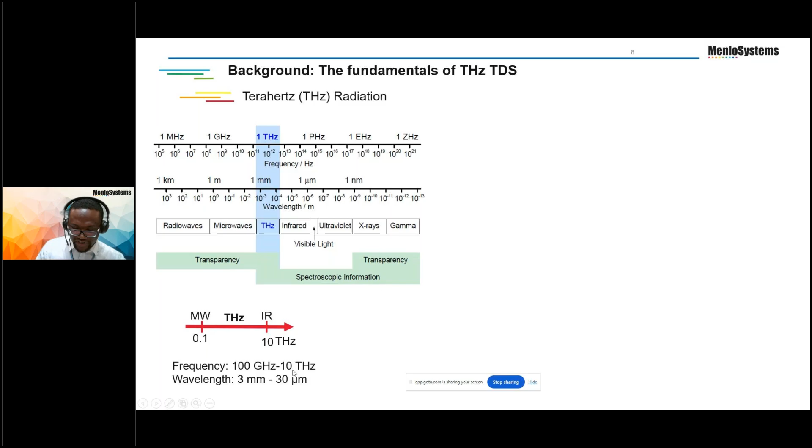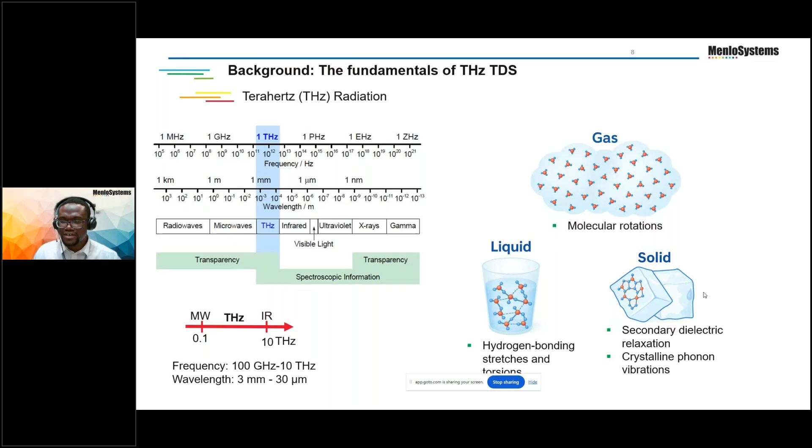And you can also do spectroscopy. About 0.1 to 10 terahertz is mostly a very interesting range for terahertz. When we consider the three states of matter, in gases we are talking about molecular rotations, so terahertz could probe this type of bonds. In liquids, hydrogen bonding. And in solids, we are talking about secondary dielectric relaxations and also crystalline phonons. So terahertz could probe this intermolecular movement.

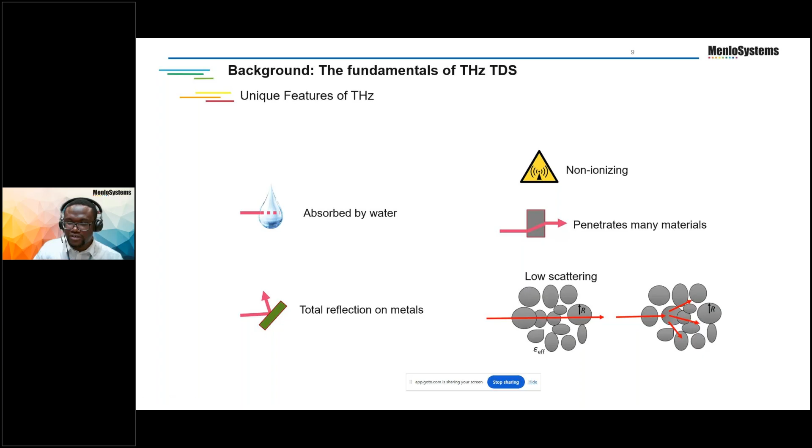In terms of the properties, as I've already mentioned, water absorbs a lot of this radiation, but metals totally reflect the radiation. It is non-ionizing and it penetrates a lot of material. And when you're dealing with powders, terahertz has a longer wavelength compared to the particle sizes, so less scattering, which means you can also penetrate, especially products made from particles.

We have two main sources. We have the continuous wave, where we are talking about monochromatic terahertz wave frequency. So you may have a single frequency and then you can tune it, typically between 0.05 to 4 terahertz. And then we have the broadband one, and at Menlo we provide our commercial systems based on the broadband systems. Here we are talking about 0.1 to 6 terahertz.

So with the continuous, it's just like dealing with X-rays or FTIR spectroscopy. Here you are measuring intensities, but with the pulses, we are measuring the electric fields, so you have access to the complex optical constants. You have both the real and the imaginary part of your optical properties.

And then the sources, there are various ways of generating terahertz. We have the quantum cascade lasers and ionization of plasmas, and with this you could have even higher watts of terahertz radiation. But we are going for the optical generation. Here we have the nonlinear way, which is called optical rectification, and then the photoconductive switches. At Menlo, we are working with the photoconductive switches because it has several advantages.

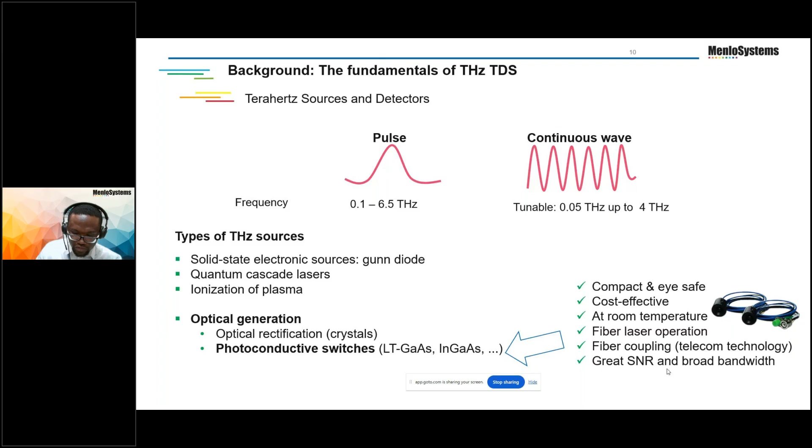So what happens at the detection? The detecting material is similar. Here you have your femtosecond laser, which pumps the detector. You create carriers, but there is no bias voltage to drive these carriers. Now these carriers are driven by the arriving terahertz pulses. So by delaying this, we can scan or sample the electric field of these terahertz pulses.

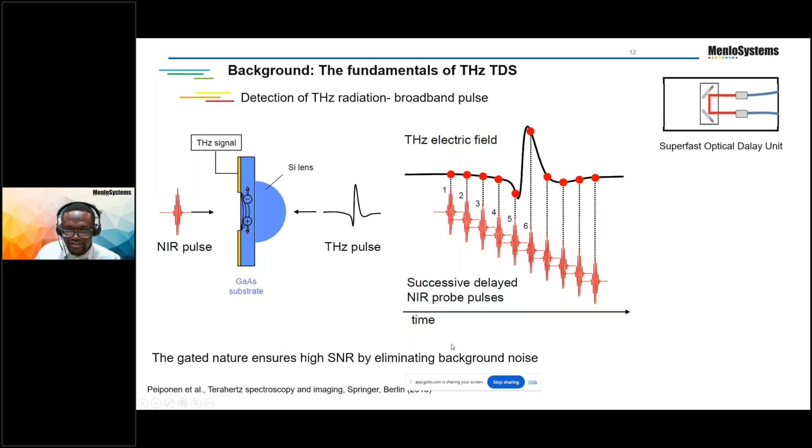As you can see, if the femtosecond laser hits the detector, it switches on, and if there is no pulse, it switches off. So this is time gated, and by means of time gating, we also get rid of background noise.

Okay, so we've put all this into a very compact system we call the TeraSmart. Here you have your delay line, your lasers, your computer and the data acquisition card, everything inbuilt, the electronics here. So this is fully compact, ready for the industry and OEM customers.

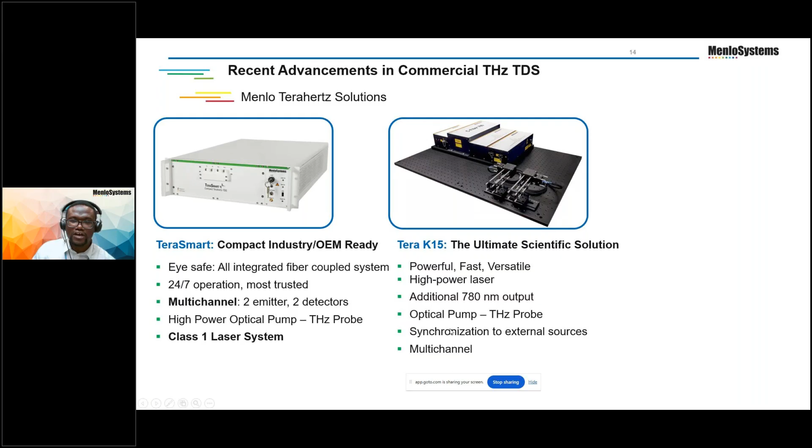And then we have the most versatile one called the K15, and this is mostly meant for scientists to play around. Here you have a bit higher power lasers, but the terahertz performance is the same. But here you can also sync the laser with an external laser. And also you have an additional 780 nanometer output of power. You can also do multi-channel. And these two systems depend on the mechanical delay line.

And now if we want to go even faster, whereby we get rid of the mechanical delay line, then comes the Tera OSE. Here we have two lasers inside this box, and these lasers are synced in such a way that we could track the time and also generate terahertz. So in this case, we don't have any moving stages. So we can scan very fast, and also we can scan very long. Okay, good.

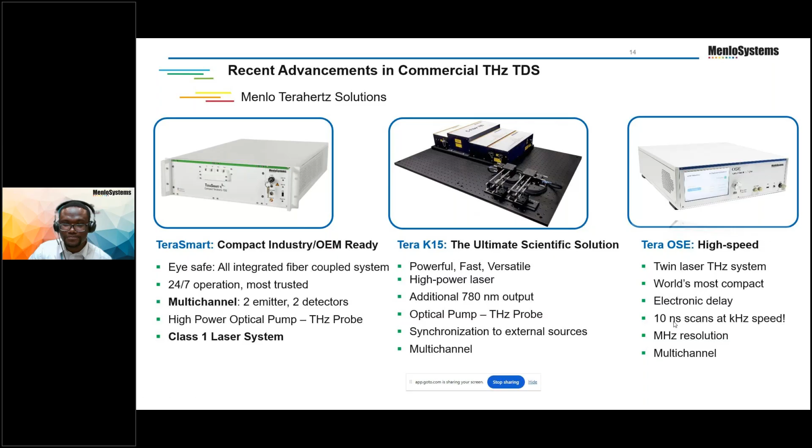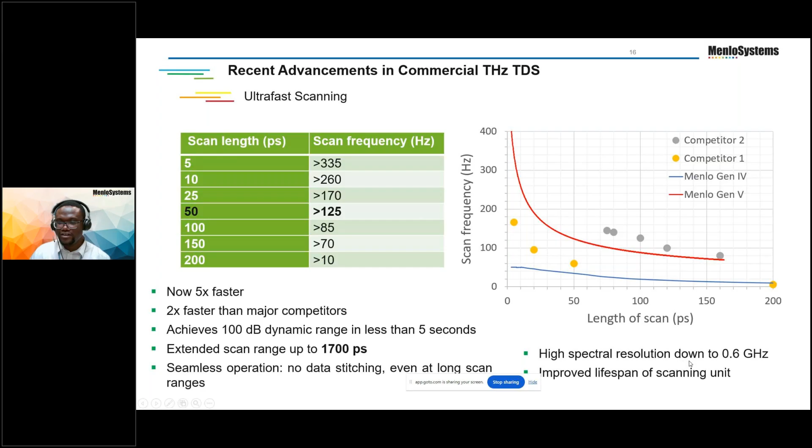These ones are fixed. You cannot change the delay line, right? The scan length. But with our systems, you can extend the scan range up to 1700 picosecond. And you can do this without any data stitching. So this is continuous scanning. And if you can scan longer, that means in frequency domain you have a good resolution.

So we have add-ons also for transmission and reflection. Here you can see our imaging stages and our transmission setup, so you could do transmission. And we have the reflection head for reflection.

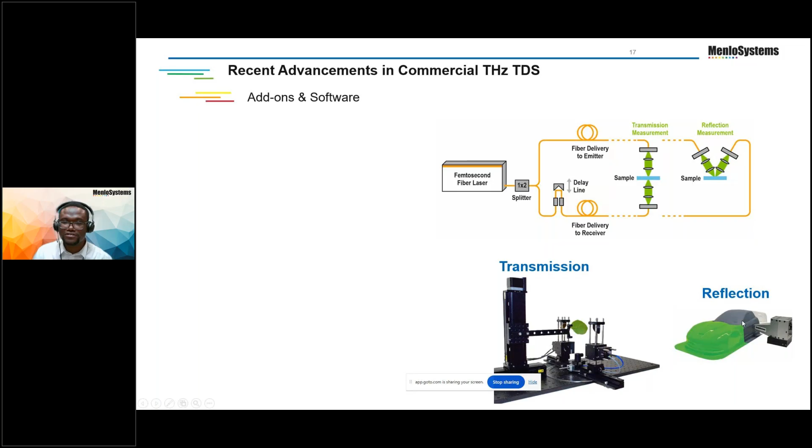And then comes the software. You cannot have good hardware without good software. In terms of software, we have very flexible and user-friendly software. During the measurement, you have software that will help you set your experimental parameters and also do your measurement seamlessly.

And due to our impact in the terahertz market, even open source projects take our systems into consideration, and they develop software which also works seamlessly with our systems. Good.

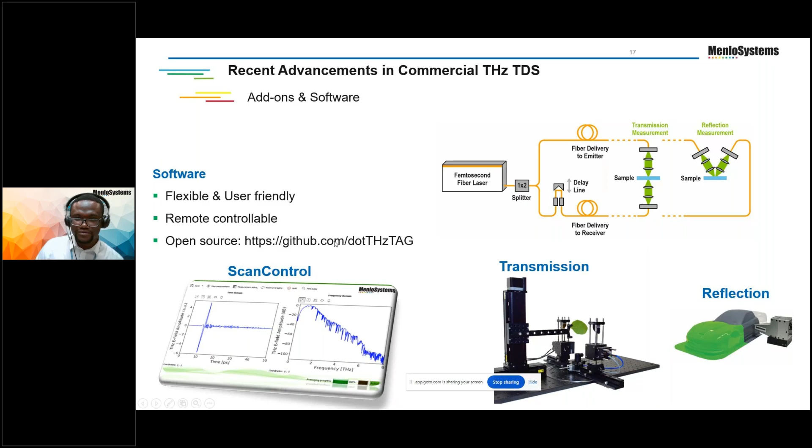In terms of the imaging, we've upgraded and now we have new imaging systems with a new software which is fully integrated. So it is now much easier to interface, it is more flexible to mount, and also working and gathering data is very seamless.

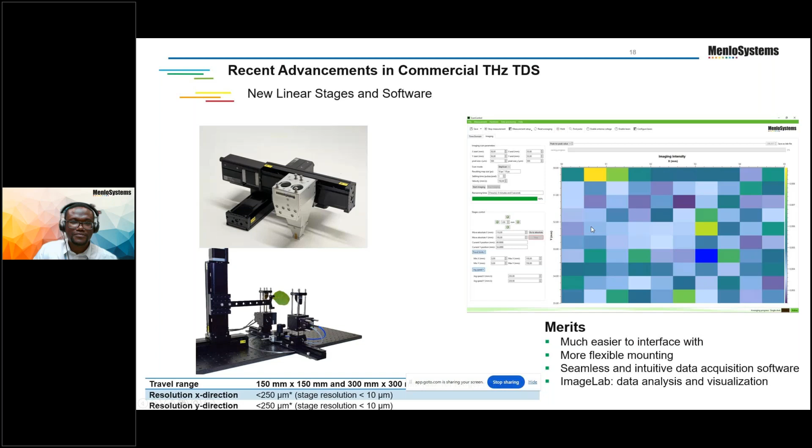The analysis, we have the Image Lab, which is also one of its kind in the market, whereby you could also do a lot of analysis, whether in the time domain or frequency domain, depending on what you want to achieve. And then for customized systems, as I mentioned, you can also do pump probes.

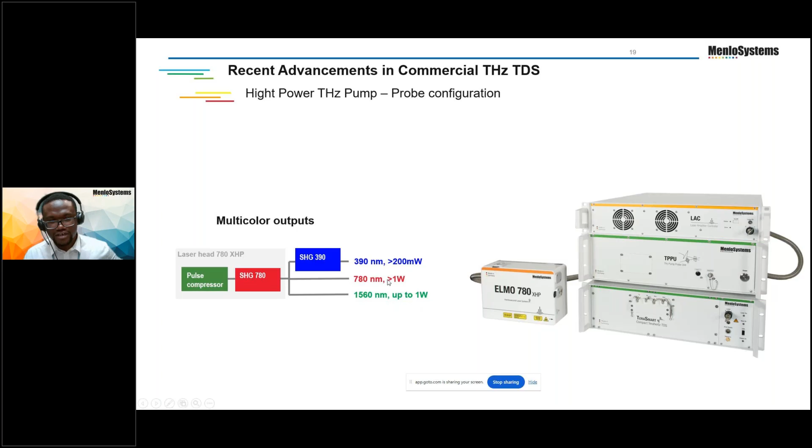So here you hit your sample with either of this, and now you measure what happens to the sample when they interact with this wavelength, with the terahertz. And as you can see here, we can do multicolor. And we can even do more than this. We can do supercontinuum and also other wavelengths and frequencies.

Okay, so that is Menlo, how we've advanced the terahertz technology and how our new systems are performing. So now let's jump into the applications. So terahertz, as we all know, it's upcoming and people are trying it everywhere. So for thickness analysis, for food and pharma, I'll just highlight some of these applications where our systems have been used. So let's jump in straight.

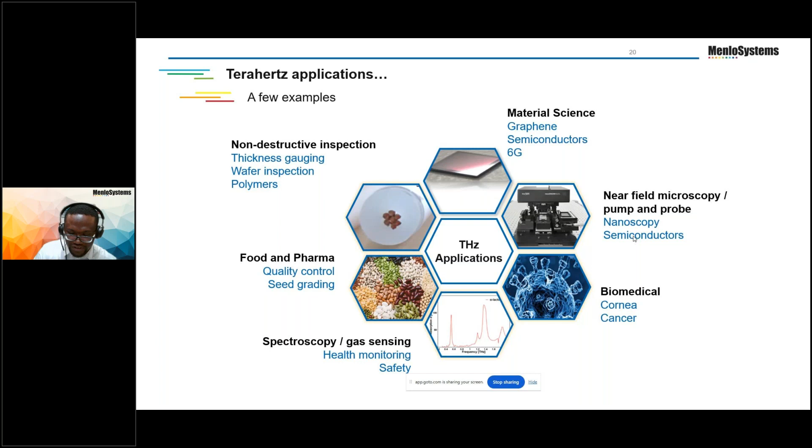So in terms of terahertz applications, thickness analysis, especially in the automobile paint industry, is gaining traction nowadays. And as you can see here, there's a company called Das Nano, and they have a fully integrated terahertz system. And this could be used in real time in checking the layers of painting in the automobile industry.

And what is the importance of doing this? For example, imagine that your car is not properly painted. This could lead to rust, and at the end of the day, it might cause them to repaint. So if you are able to track the process inline, and with terahertz, this is non-invasive, so you can even use it on the wet paint, unlike ultrasound, whereby you need to touch the surface.

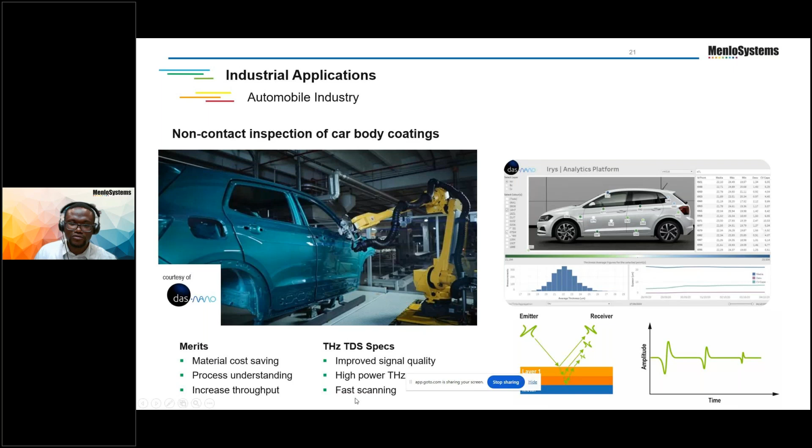So at the end of the day, you save material, you understand your process, you increase the number of cars you paint within a time, you make more profits, and also goods and products are more affordable for ordinary people. And with our new improvement, now you could predict accurately because of speed, power, and you could also scan faster because of our speeds.

And the most important aspect here to check is the uniformity of the coated material in order to make sure that every cell delivers the exact amount of voltage it is meant to deliver. So for thickness, porosity and conductivity, there is terahertz. With terahertz, you can measure the thickness non-destructively or non-invasively. You can also know the porosity.

So here there should be some spaces during charging and discharging so that the ions, especially lithium ions, can fix themselves within the pores. And when you have the optical constants, both the real and the imaginary part of the refractive index or the permittivity, then you can also translate into conductivity.

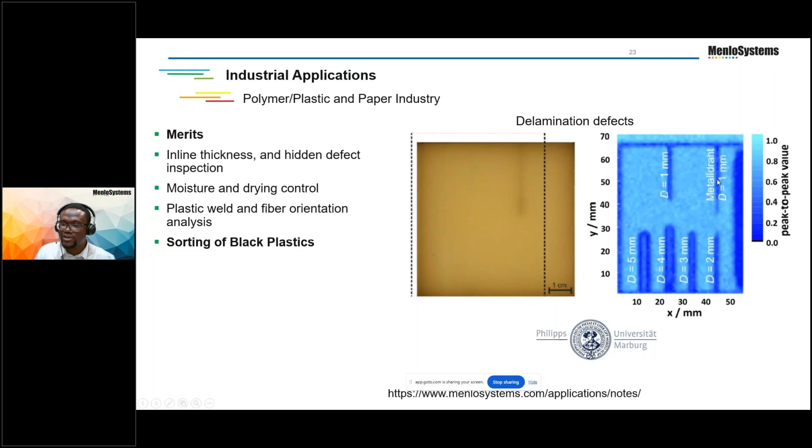And now let's go to the plastic and the polymer world. So when you check our webpage in our application notes, we've done a lot on plastics. So in this figure, you can see that we are detecting delamination or defects in plastics. And these are artificially drilled holes and also metallic substances hidden somewhere. And using terahertz imaging, you could see clearly where these are.

And then in other application notes, we work on trying to also find the percentage of fibers. Sometimes you want to make these polymers a bit stronger, so you add some glass fibers. And here you could see that depending on the percentages, terahertz imaging can also give a clear indication of how these fibers...

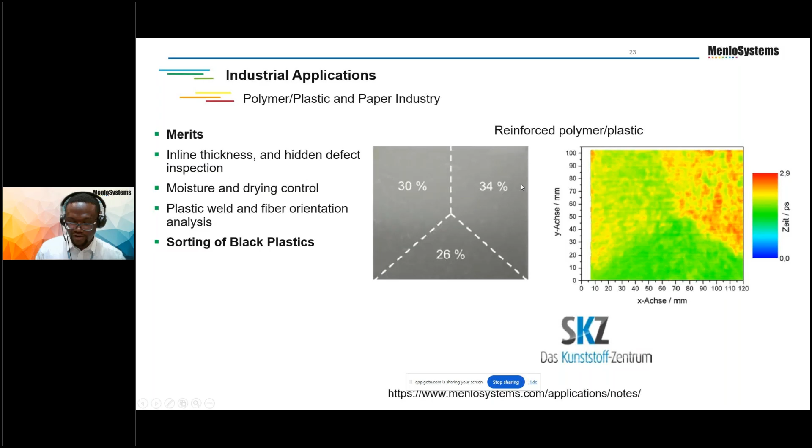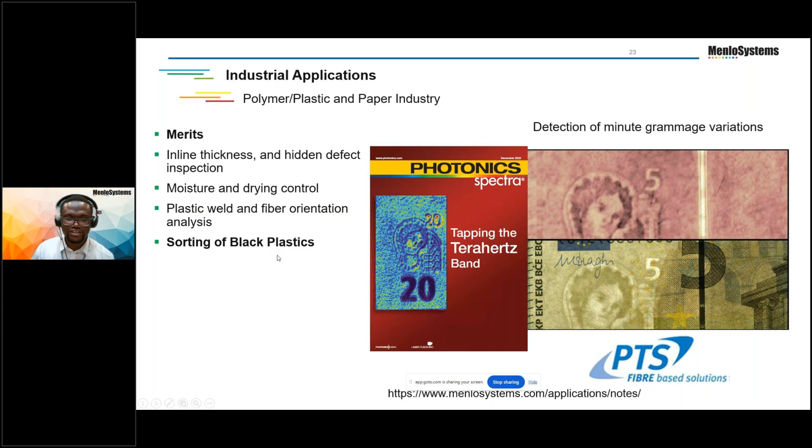And one other interesting aspect dealing with terahertz in plastics is sorting. Mostly it is difficult to sort black plastics. If you look around you, your computers or your chargers or your keyboards, many of these are black plastics. Normally this black material absorbs infrared radiation, which has been used to separate or sort them. So by adding this black material, you cannot use the conventional way. And terahertz has been the best way to sort this plastic because terahertz could permeate this black material.

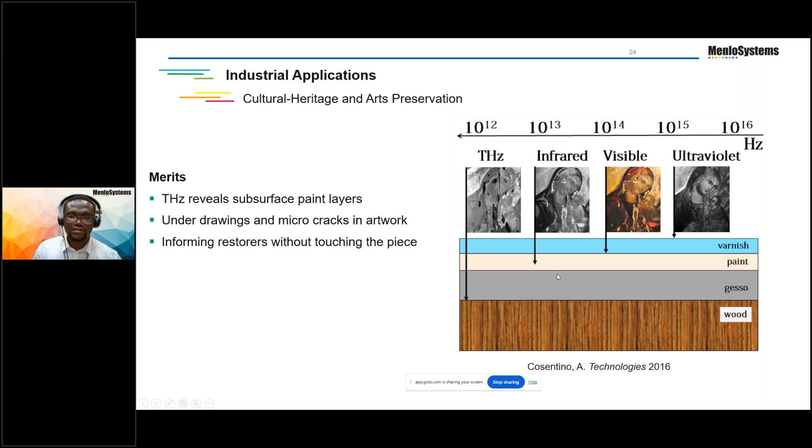And then in terms of cultural heritage and preservation, terahertz has also been used a lot in art to assess and also to restore art. By comparing terahertz to other radiations, you could see that with terahertz we could penetrate even deeper, so you could know the various layers of a paint or art material.

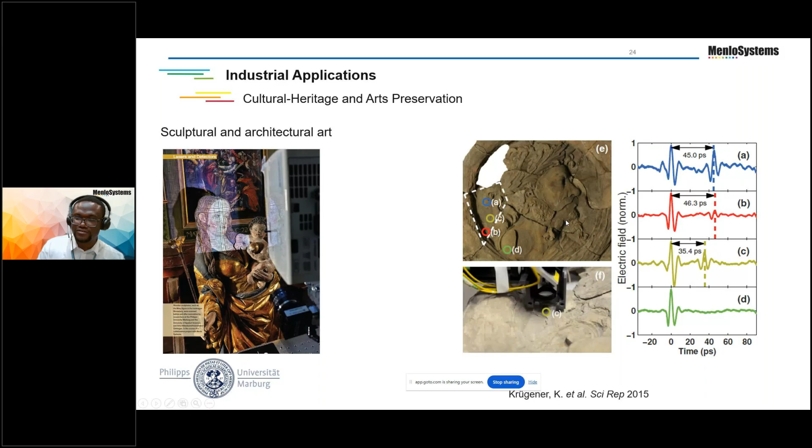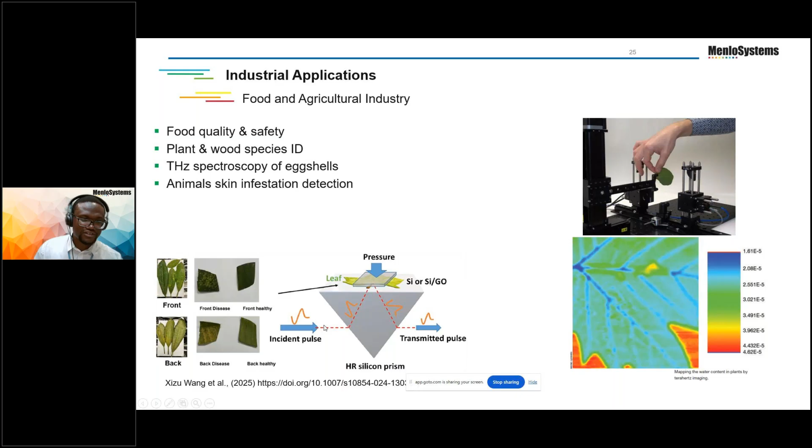And then in food and agriculture, terahertz has also been used in plants. This is an image of a leaf, and this will also give you traces of water content on the leaf. By so doing, you could also detect early diseases in plants. And other research is even using ATR methods to check the health of plants.

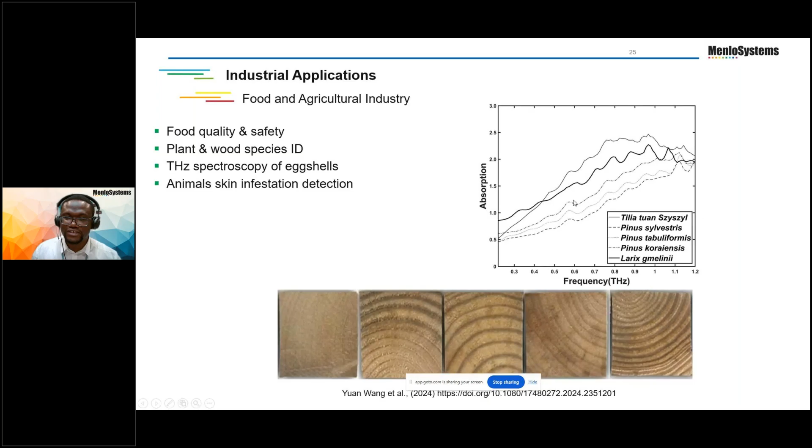Okay, and then eggs are also one of the interesting applications. You know that terahertz could permeate the shell and also the membrane. So by doing terahertz analysis, we could also check the quality or the fertility of eggs, and this will be quite interesting.

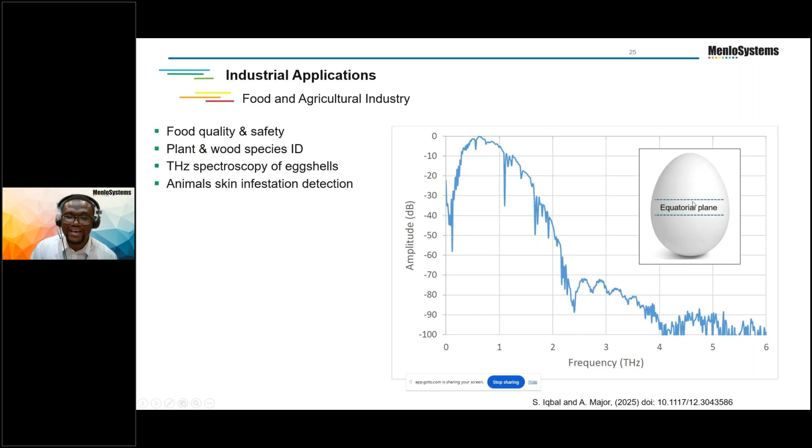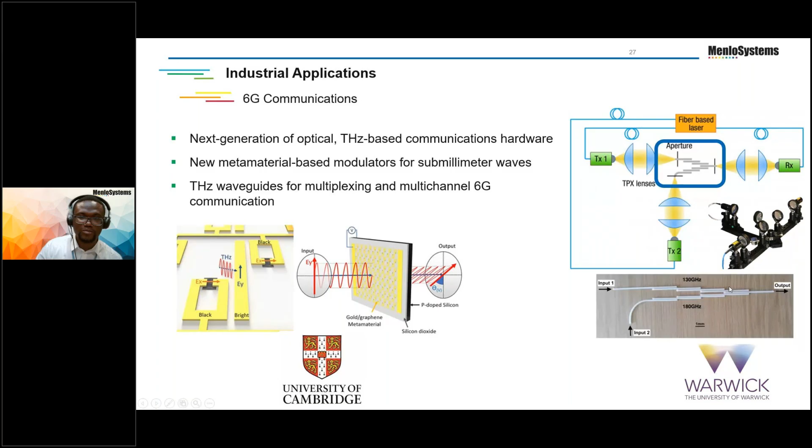And in Warwick, also building or printing multiplexing, like waveguides for terahertz multiplexing. Here you could see we have an emitter, two emitters, one receiver, and each is sending different frequencies. Depending on how the waveguides are made, we can multiplex these signals. This is the future of communication, and this is how our systems are also helping develop this area.

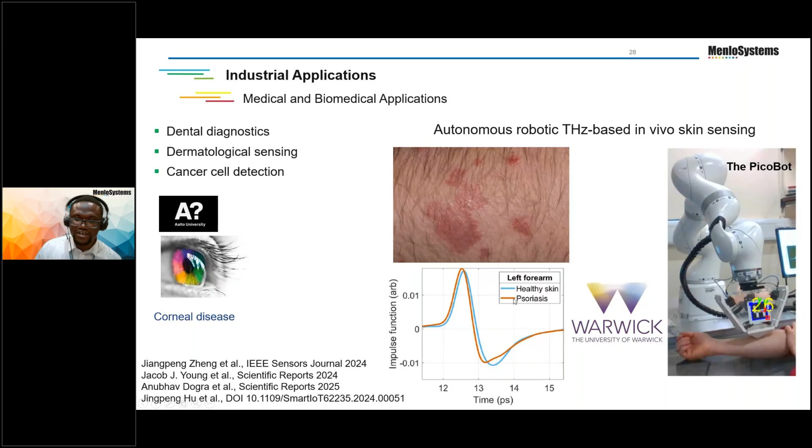These are some of the interesting examples. Now I want us to go a bit more into pharma. I think I still have some time left here.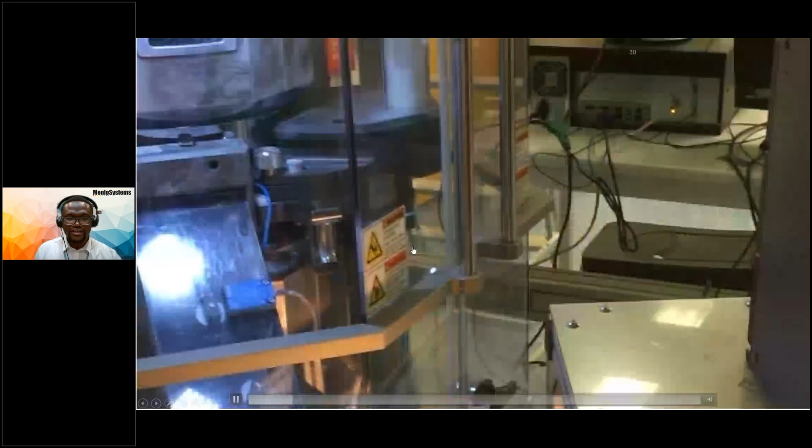In the area of pharmaceutics, the drugs we take are tablets made up of different powders, grouped mainly into either active ingredients or excipients. These powders, before turned into tablets, are mixed well, then go into the tableting machines. In the real world, these tableting machines are so huge that some of them even create 1 million tablets within an hour. So at the end of the day, you have different types and shapes of tablets for different purposes.

We have immediate release drugs like the painkillers we normally take, where you want the drug released immediately. Then we have extended release drugs. Some tablets are coated, some are not. At the end of the day, you need to check their release properties - what we call the dissolution and disintegrating properties.

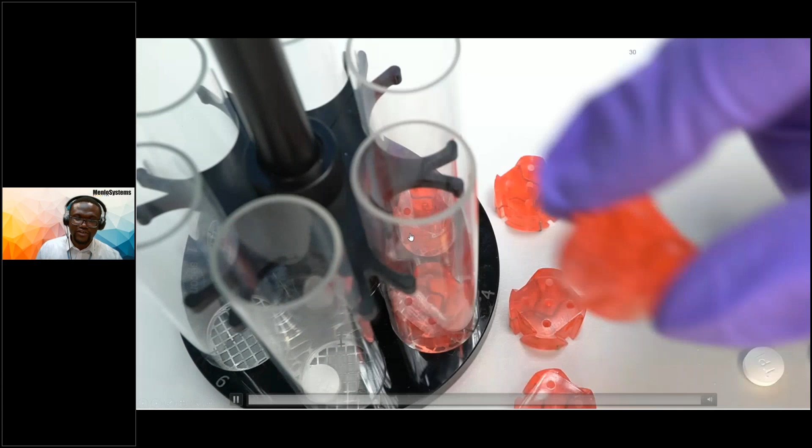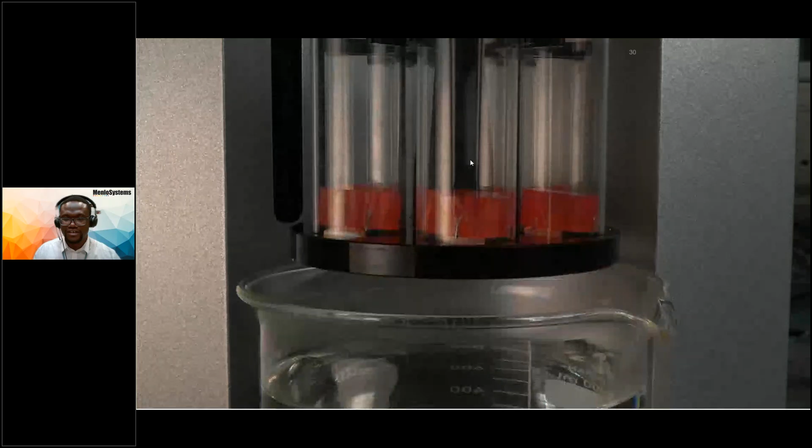With the dissolution properties, we want to see how this drug will be released in terms of concentration. You put your tablet in a bath which simulates the human body fluid, then check how the drug is released per minute or hours. Normally we have the pharmacopoeia, which specifies this time of release. If it meets the pharmacopoeia, you can sell it. But if it fails, you have to destroy the whole batch. This is what has been done for years.

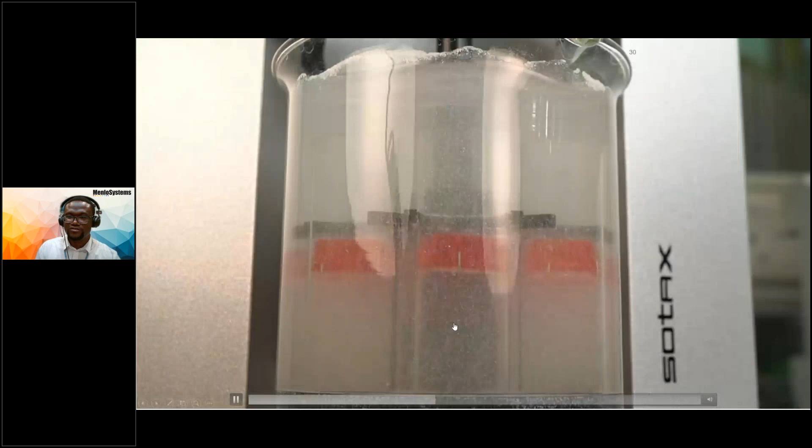But now using terahertz, we want to really understand. When you take a tablet, you can see that porosity plays a major role. When we talk about porosity, we mean the amount of air volume or particles in the drug after compaction. A tablet with higher porosity will dissolve or break down faster than a tablet with lower porosity. That is why porosity is a major property which drives these release properties.

And with terahertz, we are trying to find a way of detecting these porosities non-destructively. You take a terahertz pulse through a tablet - this is in transmission, or you can also do it in reflection.

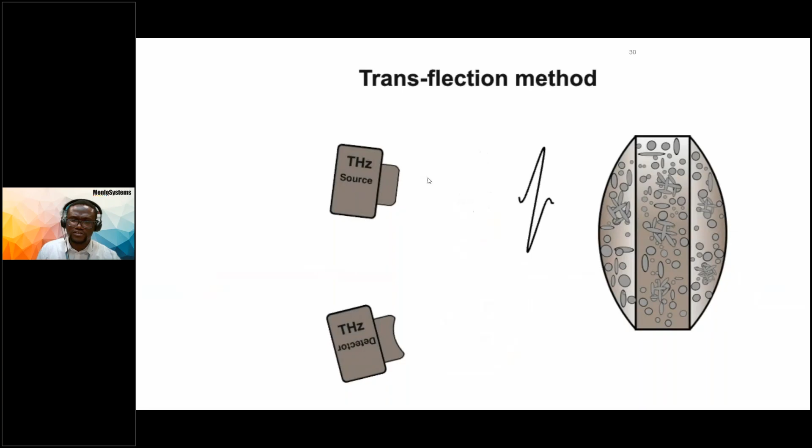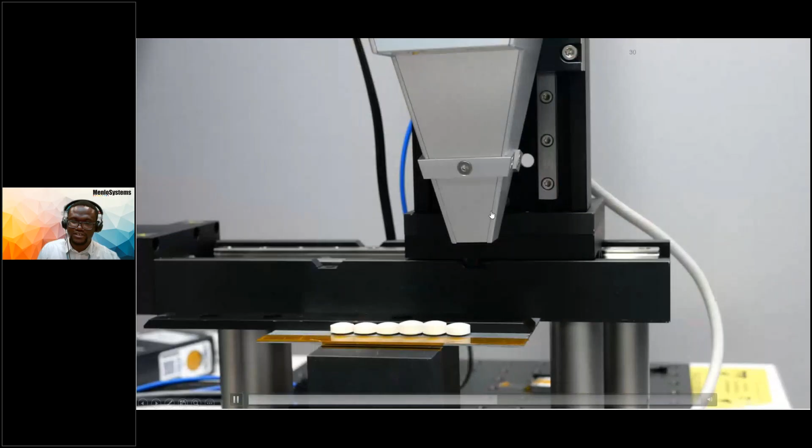By capturing the transmitted or reflected signal, we can get the refractive index and convert it into porosity. In this research, together with the University of Cambridge, using our reflection head, we pan it around the tablet. Given the high power nature of our terahertz sources, we use just a single terahertz pulse to detect the thickness and also the porosity.

As you can see, it's reflection-based, which means you can easily incorporate this into the production line, and even use it on already packed or blister-packed tablets.

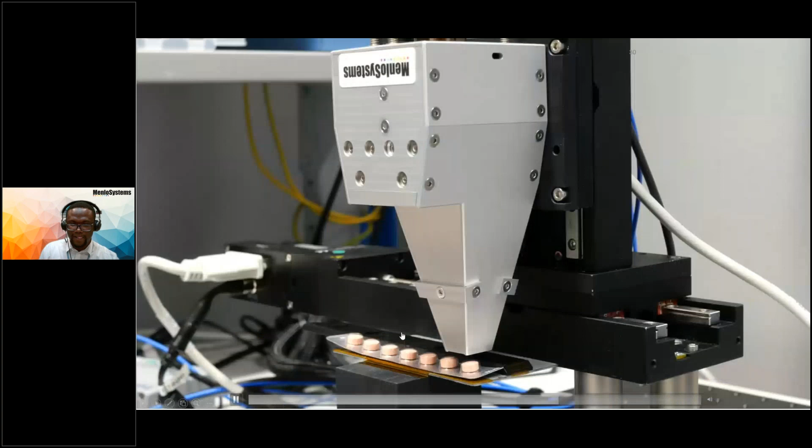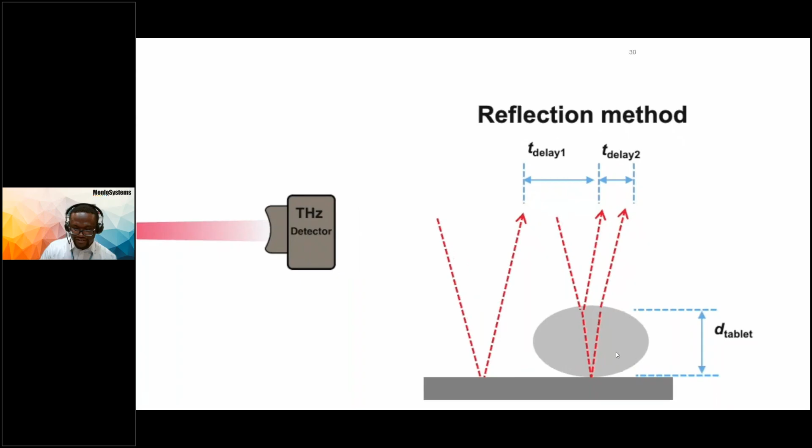So by tracking the reflectance, using delay one, we can get the thickness, and using delay two, we can get the refractive index or the porosity. Going a bit forward here, I want to let you know that we are not just tracking the porosity.

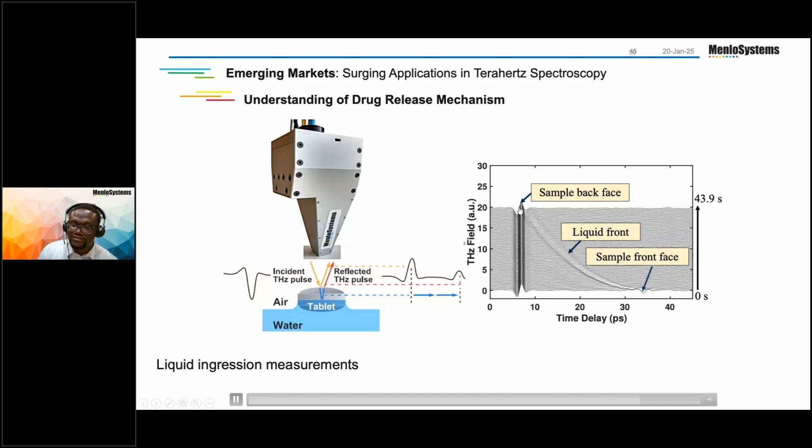We also want to understand the mechanism of water ingression through the tablet. So you have your reflection head with the tablet, and then you dip it into the water, doing real-time analysis, and we can track the waterfront. By tracking the waterfront, we will know the disintegration time, and by tracking the first pulse, we can also check the swelling.

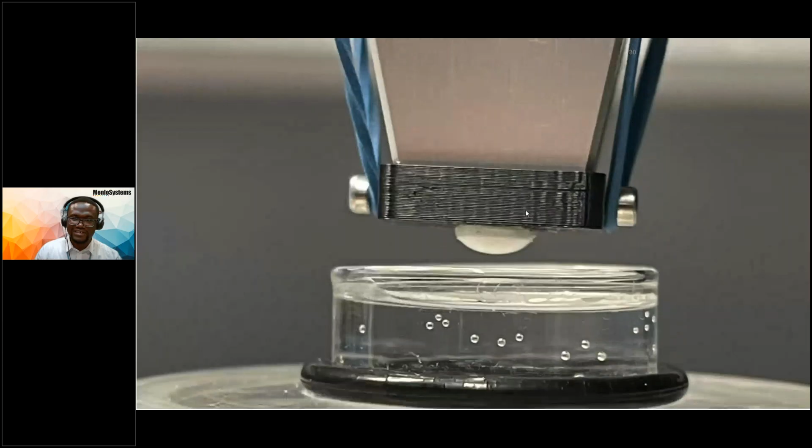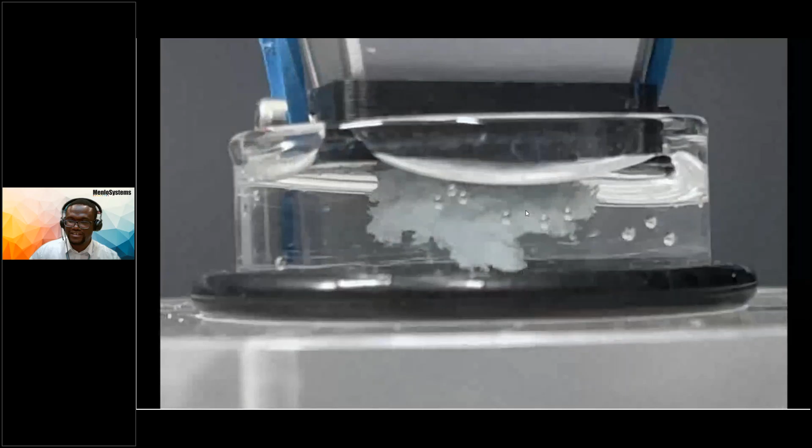This, together with models, will help us understand our drugs. If you understand the release properties of your drug during manufacturing, the development time is reduced, you understand the process, and the quality of your drugs is already defined in the process. This is what is called quality by design in pharma, and this will make drugs faster, cheaper, and everybody will have access to good drugs.

From this work, recently our colleagues at Cambridge have published an article, and you can see that our TeraSmart system is sitting right in the center of their lab. This is the reflection head, and using the high power terahertz sources, it is easier to extract your data.

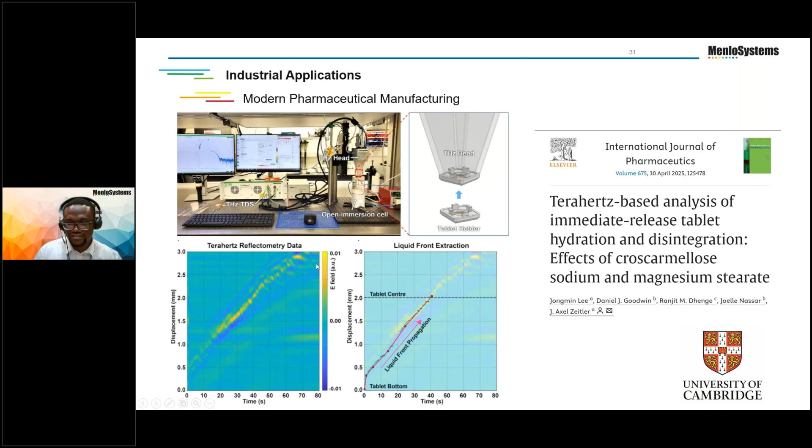Together with them, we did some research also here at Menlo, where initially, in order to get the porosity of the tablet, you have a laser which does the thickness measurement, and then this moves to the terahertz, then you do your terahertz. But then you can imagine that you have various steps and more errors.

But with our new high power system, this allows us to use a single terahertz source, and with a single terahertz source, we can track the thickness and also the porosity, as you can see here. This manuscript has been accepted just this week by this journal.

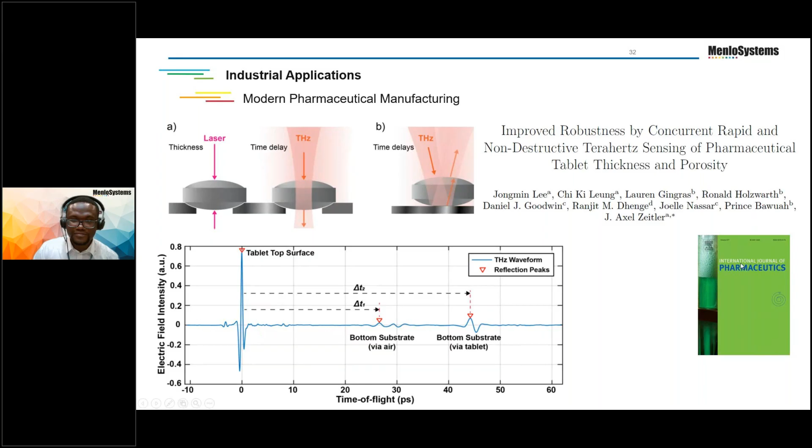In summary, I would say that we have several benefits from terahertz waves, and this comes as a complementary technique to existing ones like near infrared, mid infrared, Raman, X-rays, UV, visible. The main composition of the terahertz system is a laser.

When we're talking about a laser, you should have a good, very stable laser so that you don't destroy your antennas. With the Menlo figure 9 mode locking systems, we have a very stable laser, and in that case, our antennas are safe.

So, applications I've taken you through. We have several applications, and what I've shown you is just some very recent applications where our systems have been used. We provide the most compact, versatile, and powerful systems, which are ready for the industry and also ready for OEM applications.

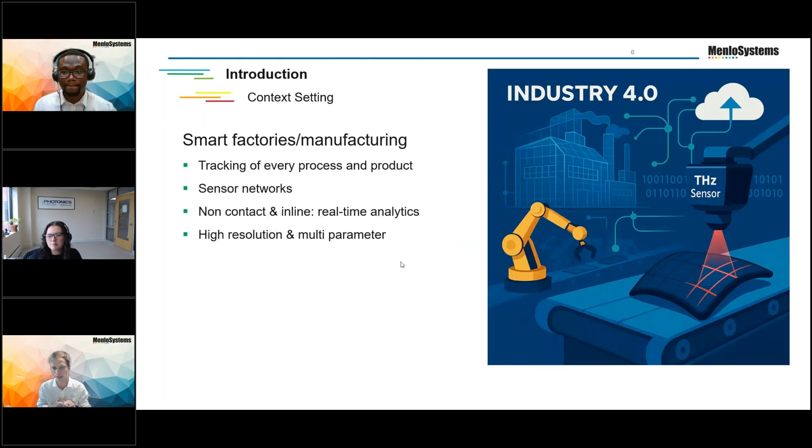I have to confess I am not an expert in those materials, so I'm not 100% sure. From what I do know of glass fabric reinforced thermoplastics, my understanding is it's a polymer material where fibers are used inside of it in order to strengthen that polymer.

In terms of looking for defects in that, it would really depend on the defect size you'd be looking at. Typically when looking for defects or imperfections in a material, you're usually limited by the spot size of your terahertz beam at focus, which is typically around 250 microns or so. So if you're looking for specific spot defects in a material, generally with terahertz this is your spatial resolution. However, if you can find that kind of response, as you can see here with the different degrees, you can see the different material compositions.

We can see the different material compositions of the polymer in different segments, and we scanned across millimeters there. However, sub-millimeter spatial resolution tends to get a little difficult. So depending on the defect size you're looking for inside of that material would be, I think, the biggest limiting factor. But the material properties themselves seem very well suited to terahertz.

Yes, and also to add to that, I think when you check our application notes, we've done some work before with SKZ or Marburg, whereby we've studied fiber orientations in these plastics. So at the end of the day, terahertz will give you an idea about how these glass fibers are oriented, and then if you know their orientation, it will also give you an idea about their strength.

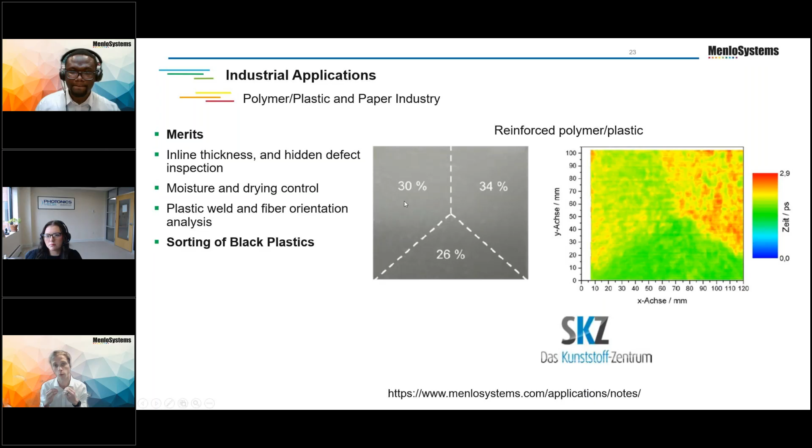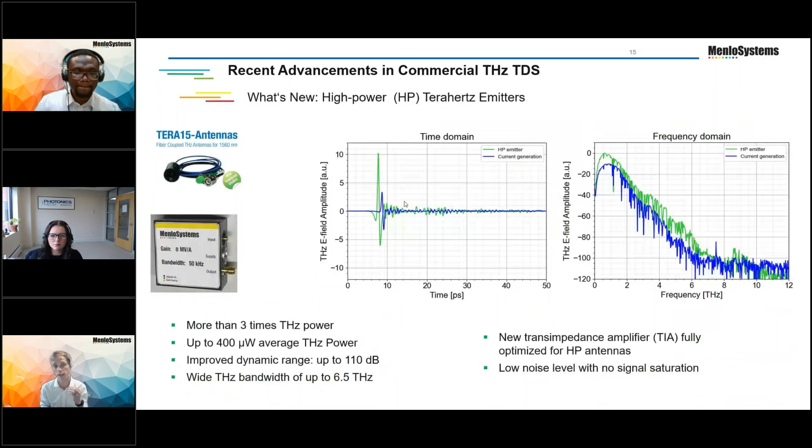Actually, this tends to be a spectral range that we at Menlo Systems really don't cover typically. We typically work very well at infrared wavelengths, starting at 1 micron or 1550, and then get out to mid-infrared, say from 3 microns out to about 15 or 18 microns. From there, we generally generate terahertz using, as Prince was presenting, photoconductive antennas, which generally covers this 100 gigahertz to 10 terahertz range.

So 3 millimeters corresponds to 30 microns. Oh, it does actually. I'm sorry, I had that a little off in my head. Yes.

Okay. So just real quick, typically getting to those higher frequencies tends to be a bit difficult with the materials that we use. It's certainly possible. However, with our standard instruments it tends to be a bit tricky just due to trying to cover all of the wavelengths all at once. So depending on your specific spectral range of interest, feel free to reach out to us separately and I can give more in-depth information. Yes. So 10 terahertz is about 30 microns. So, yeah.